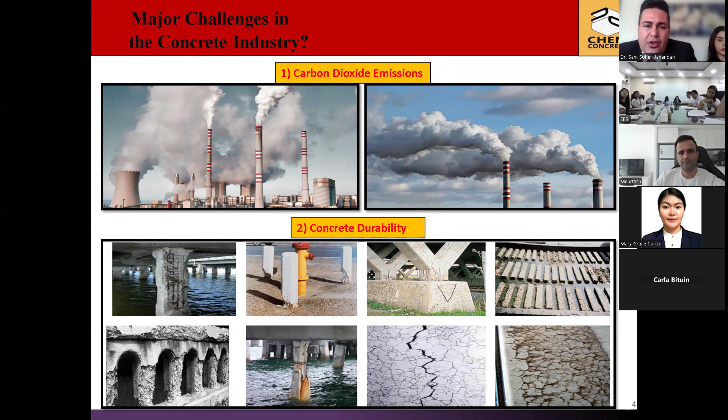In terms of carbon dioxide emissions, we all know that the cement industry is responsible for over 8% of global CO2 emissions. This issue could be addressed by minimizing the amount of cement in concrete, and another way is to extend the service life of concrete structures, so we can improve strength and durability while minimizing cement. I will discuss this in further detail.

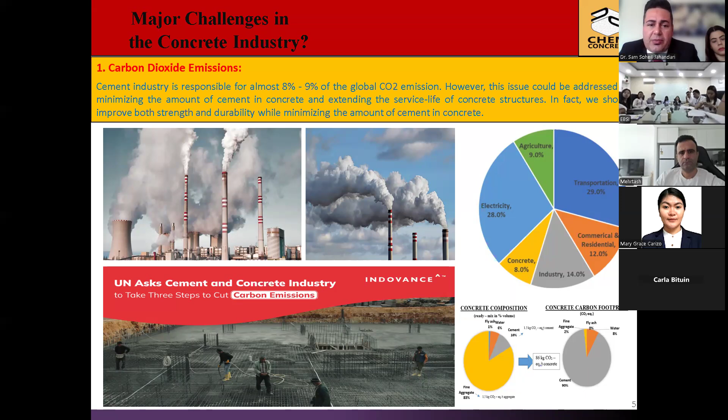In terms of concrete durability in all aggressive environments, like exposure to chloride, acid, sulfate, freezing, thawing, ASR, efflorescence, hydrostatic pressure, rainwater, steel corrosion, salt attack, research and science has proved that the ingress of water and the corrosive chemicals inside water is the main reason responsible for all the major physical and chemical degradation of concrete structures, infrastructure, and pavements, which shortens their lifespan and results in annual costs of billions of dollars to asset owners.

For improving the durability of concrete, we can use surface protection coatings, membranes, or integral waterproofing. But integral waterproofing admixture has several benefits over surface protection, because integrally waterproof concrete is not vulnerable to deterioration, does not require regular maintenance or reapplication, does not include application cost, reduces construction time, and can be used where surface protection is too complex or impossible to apply, like deep foundations.

Here you can see, for example in the photos, exposure to seawater, physical salt attack, alkali silica reaction - also known as concrete cancer - sulfate acid attack, freezing thawing, reinforcement corrosion. In all these conditions, the penetration of water and the corrosive chemicals inside water is the main reason responsible for the deterioration of concrete.

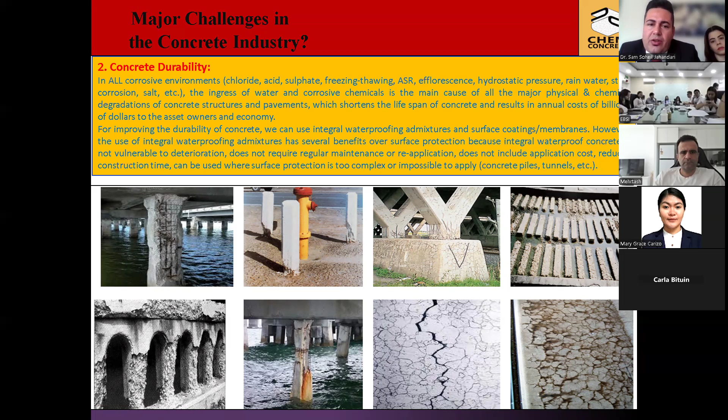Over the past 8 years, our R&D team, mainly in Australia, conducted an extensive review study and reviewed almost all the existing knowledge in the area of concrete waterproofing admixtures and durability. We reviewed over maybe 4,000 articles and books published in this area, and we have published the most comprehensive sources when it comes to concrete waterproofing admixtures. Here you can see the first article, Integral Waterproof Concrete: A Comprehensive Review.

I'm the first author here. This is currently the most comprehensive source on integral waterproofing admixtures for all engineers, PhD students, scientists, and R&D experts associated with the development of waterproof concrete. The next article is focused on integral hydrophobic admixtures, one type of concrete waterproofing admixture. The next one is focused on self-healing crystalline admixtures. The other one is on coatings, primers, and different additives.

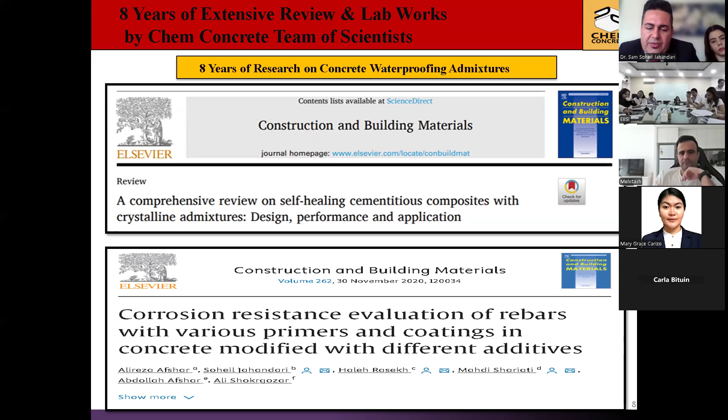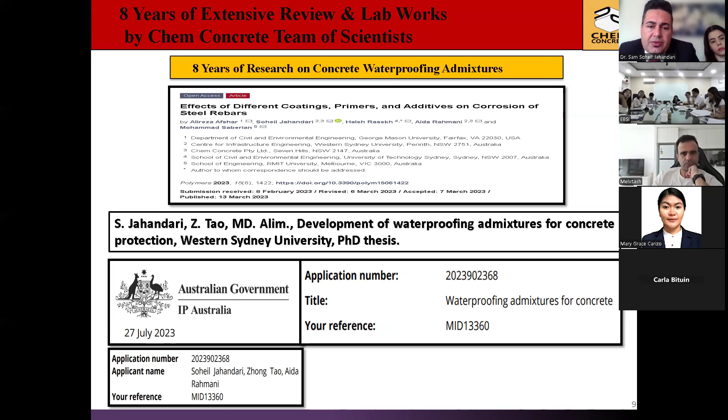My PhD was also focused on development of waterproofing admixtures for concrete protection. We also have patented our technology, which is right now a globally protected patent.

The major findings over the 8 years of our research studies, by our well-known team of six globally distinguished professors, 14 PhD holders, and over 8 engineers specialized in the field of concrete technology, material science, and chemical engineering.

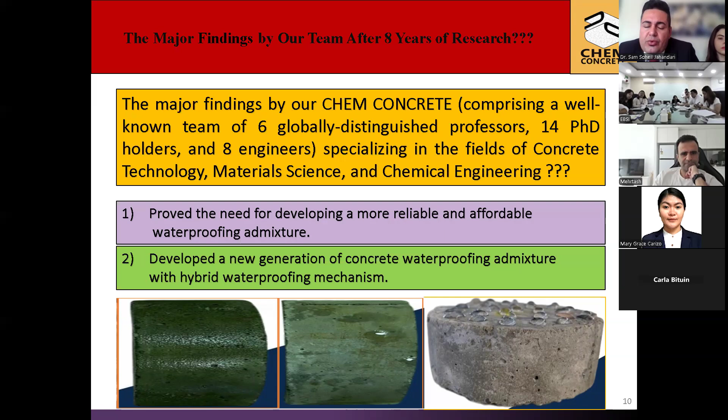We proved that there is a need for development of a more reliable and affordable waterproofing admixture, and at the same time developed a new generation of concrete waterproofing admixtures with a hybrid or multifunctional mechanism. This slide is somehow very important because it summarizes the main finding of over 7-8 years of our research studies in just one paragraph.

Over almost 8 years of literature review and experimental studies on a wide range of concrete waterproofing and durability enhancing admixtures, we showed that the current admixtures on the market can improve concrete waterproofing or durability performance often by around 2% to 25%, and in most cases, maybe over 90% of the times, by only around 10%.

This claim has also been reported and proven by several other independent organizations and independent researchers, such as the Concrete Society in the UK. Similar reports have also been published by the Concrete Institute of Australia, and in some other publications. We have provided some examples here. Accordingly, there was a need to further improve the waterproofing performance of these admixtures, or develop a more reliable and effective solution to tackle the issue with concrete waterproofing and durability.

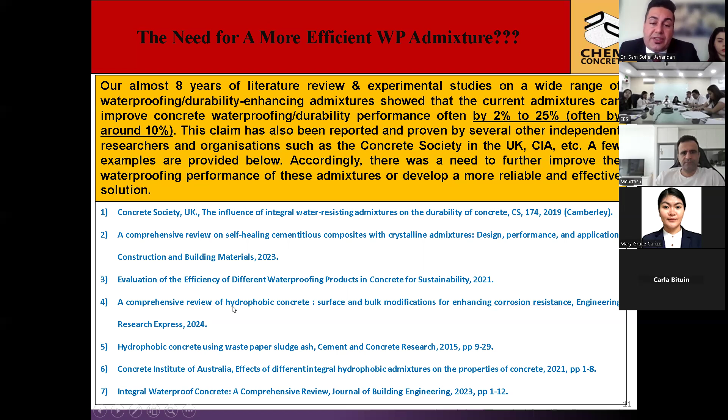For example, here the first report, just recently, the Concrete Society in the UK, as an independent party, conducted a comprehensive research on a wide range of current commercial waterproofing admixtures, and the conclusion is that they reported almost all the examined products were found to be either ineffective or with quite limited impact on delivering a true waterproof and durable concrete. Similar reports have also further confirmed this claim.

Then after that, we worked for several years and eventually developed hybrid ChemConcrete waterproofing admixture, which is a new generation of concrete waterproofing and durability enhancing admixtures.

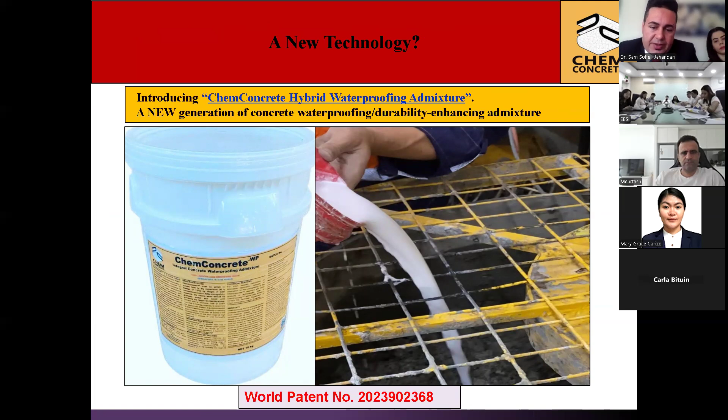You can see it's a world patent. The mechanism by which our ChemConcrete waterproofing admixture provides a waterproof and durable concrete is fundamentally different from all the existing admixtures on the market.

Just a bit more information about the mechanism. Before our admixture was introduced, concrete waterproofing admixtures were mainly classified into three to four groups: hydrophobic or water repellent admixtures, which can reduce water absorption or improve durability by up to 25% in the best case; pore blocking admixtures, which similarly can reduce water absorption and improve durability by up to 25%; crystalline admixtures, also known as self-healing admixtures, which can reduce water absorption or improve durability by up to 25%; and densifying admixtures, which are less effective and can reduce water absorption and improve durability by up to 20%.

But our patent and our technology is a new category of concrete waterproofing admixtures, called hybrid admixture. Independent testing has proved that this hybrid admixture can reduce water absorption and improve durability by 70 to 95%, depending on the dosage used.

Current waterproofing admixtures on the market normally use only one waterproofing mechanism or agent, like hydrophobing, crystalline, self-healing, pore blocking, or densifying. But in our ChemConcrete Hybrid Admixture, different waterproofing agents such as hydrophobing, pore blocking, self-healing, densifying, and nanosized chemicals were modified and used together. That's why this product benefits from a more comprehensive hybrid waterproofing mechanism, with significantly improved performance in enhancing concrete durability, strength, waterproofing, and overall quality.

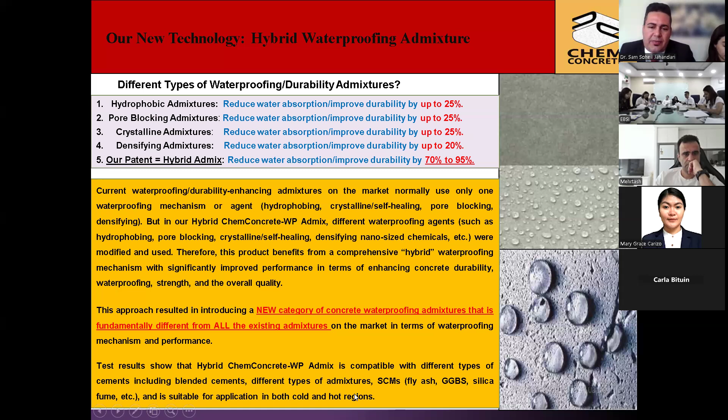It's usually a white to gray, grayish color, and is normally suggested to be used at a dosage of 10 to 20 liters per cubic meter of concrete, or 2 to 4 gallons per cubic yard. Sometimes we've noticed that as little as 5 liters per cubic meter is also used. We supply this admixture in 15 and 20 liter pails, 200 liter drums, and 1000 liter IBC tanks.

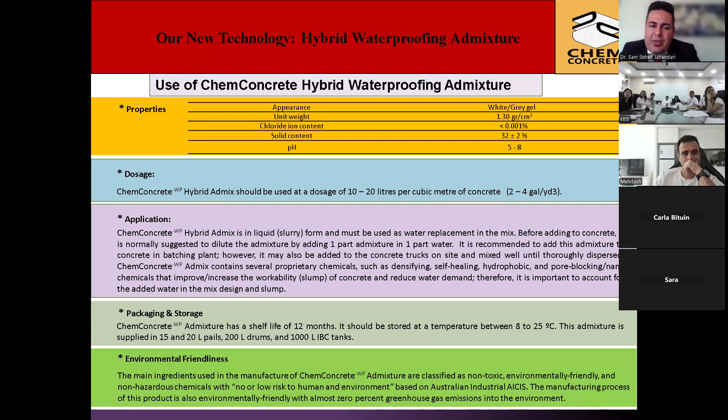It's environmentally friendly. Here, independent research was conducted by universities in Australia and the UK — they got free samples of different products and we asked them to do testing, comparing different products with different technologies and waterproofing mechanisms against our product. This summarizes the most important characteristics.

Concrete treated with two crystalline admixtures, one pore blocker, one hydrophobic, and one densifier was compared with our hybrid ChemConcrete waterproofing admixture. The 28-day compressive strength of control, untreated concrete was 39 MPa. For the first crystalline it was 39, second crystalline 40, pore blocker 41, hydrophobic 37, and densifier 41. But with our product, it was 58 MPa.

In all these conditions, the highest dosage recommended by the suppliers was used. A similar trend was observed for flexural strength. In terms of water absorption, control concrete had 8.1% water absorption. The first crystalline had 7.6%, second crystalline 7.5%, then 7.3%, 6.9%, and 7.1%. So in general, they reduced water absorption by around 10%.

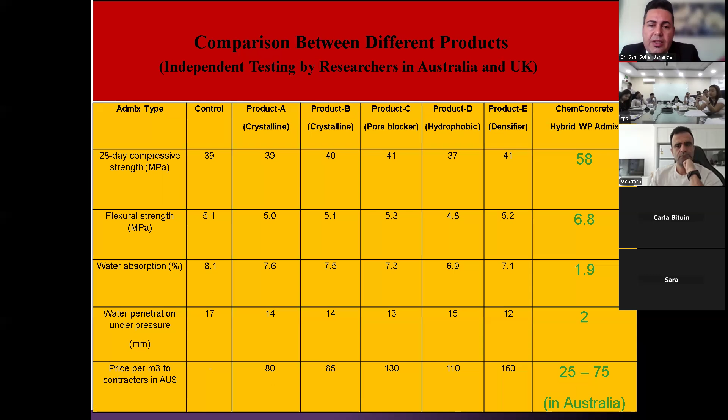This is another research conducted by independent researchers and universities in the UK and USA, comparing water absorption. This is a published research.

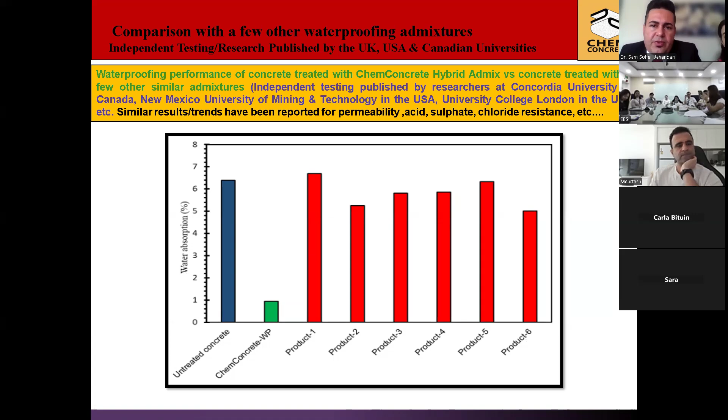Just like in terms of water absorption, you can see controlled concrete versus concrete treated with our ChemConcrete waterproofing admixture, and also 6 other products. You can see the huge difference that our product has generated on the waterproofing performance of concrete. So you can see a few photos of our concrete lab.

To summarize the main independent test results, it's been proven that our product can reduce the water absorption permeability of concrete by 70 to 95%. It improves compressive and flexural strengths by 20 to 45%, improves abrasion resistance and elastic modulus by 20 to 42%. In terms of compressive strength, sometimes we have achieved even up to 55% as well.

It reduces drying shrinkage by 18 to 40%, improves crack resistance by 30 to 45%, reduces cement usage by 16 to 32%. It all depends on the dosage of the admixture used. It improves workability, finishability, and segregation resistance, eliminates excessive bleeding, has almost no impact on setting time or heat of hydration, and significantly improves durability in acid, sulfate, chloride, ASR, and freezing-thawing conditions, and also prevents steel corrosion and efflorescence.

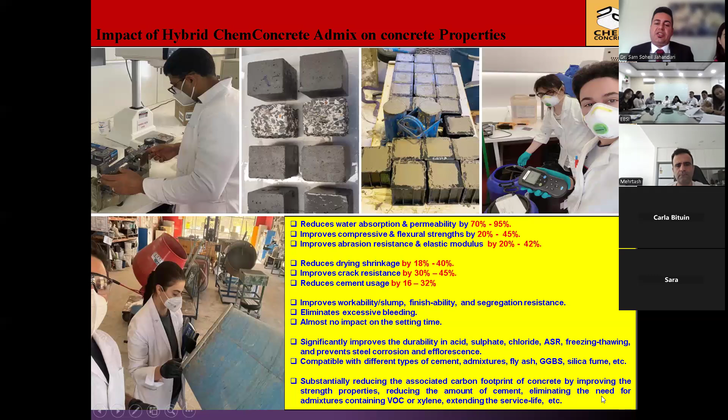It substantially reduces the associated carbon footprint by improving the strength properties, reducing the amount of cement, eliminating the need for admixtures containing VOC or xylene, and also extending the service life of concrete.

So far, during the first year, we supplied free samples of our product to over maybe 70 to 80 companies and universities from different countries. In return, we asked them to provide us with independent testing certificates. That's why right now our product is probably the most independently tested and proven admixture on the market.

So far, it's been independently tested by several ready-mix concrete suppliers, both in Australia and several other countries, by private laboratories and companies both in Australia and overseas, and by several universities and academics in Canada, the UK, the USA, Australia, and several other countries as well. Some of the test results have already been published in international conferences or journals.

In brief, all the independent test results we have received so far show that those companies have reported and received similar results to what we have reported in our technical data sheets. They have further proved the effectiveness of the product. Here in the left table, you can see the acid, sulfate, and chloride resistance of control concrete compared to concrete containing our admixture. In the right table, you can see the water absorption, water penetration, and some other concrete properties.

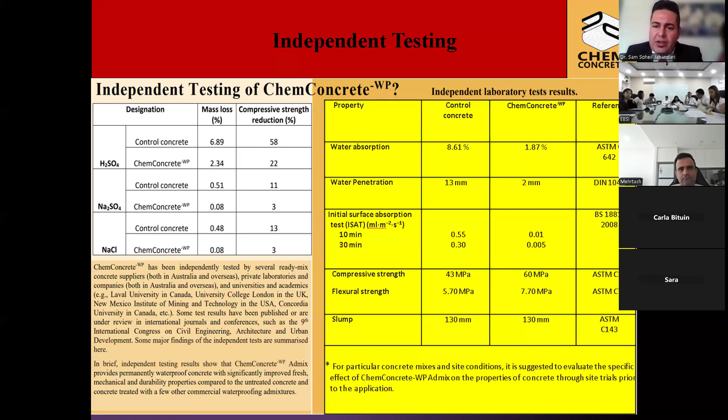And the good thing is that recently we received, our admixture passed the requirements of ASTM C494, and we received a compliance certificate from an AASHTO certified lab, SGS TEC Services in the USA, which is one of the most well-known labs for this.

Excuse me, would you please mute yourself? Sorry, John. Sorry, sir. Sir Sam. Yeah, sorry, they are asking. You hear me, Sir Sam? Yes, they are asking what is the composition. We will answer all these questions after the presentation is done. Okay, I think that would be more convenient for you as well.

So we have received a compliance certificate with ASTM C494 from SGS TEC Services in Atlanta, and the product passed all the requirements of that standard. The product was also tested by Boral, which is probably the most well-known NATA accredited laboratory, and it also passed all the requirements of AS 1478.

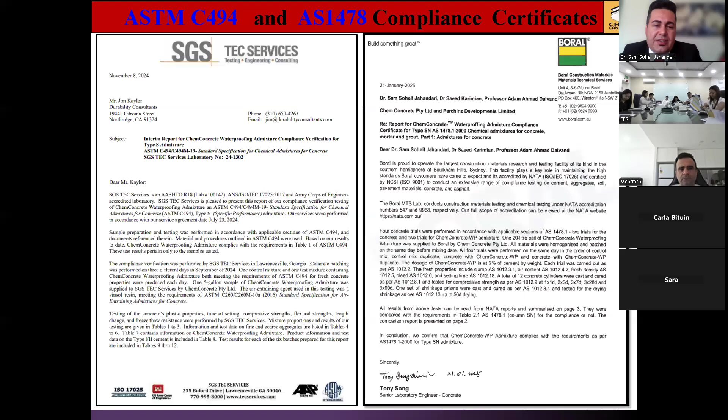So two of the best, probably the most widely used standards for compliance of these products. Regarding ASTM C494, which was tested by SGS TEC Services, a well-known AASHTO certified lab in the USA, you can see some test results.

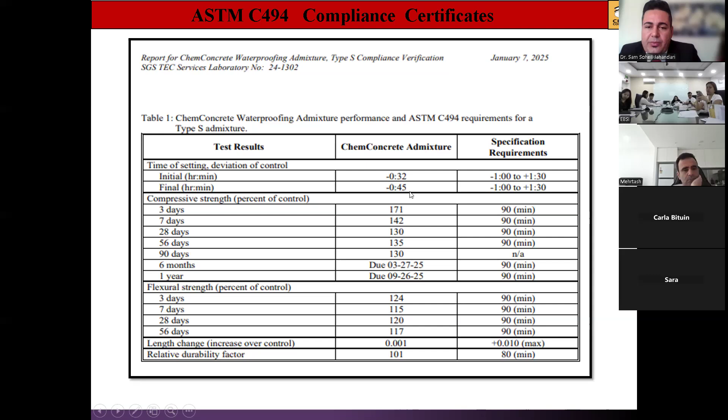It passed, after 3 days, the requirements of - for example the standard was 90% compared to the control, but for our product it was like 171%. In all these conditions, our product passed all the requirements of the standards with very impressive test results, way much better than the minimum requirement. You can see some other similar test results for flexural strength, for length change, for freezing-thawing, and for other properties of concrete.

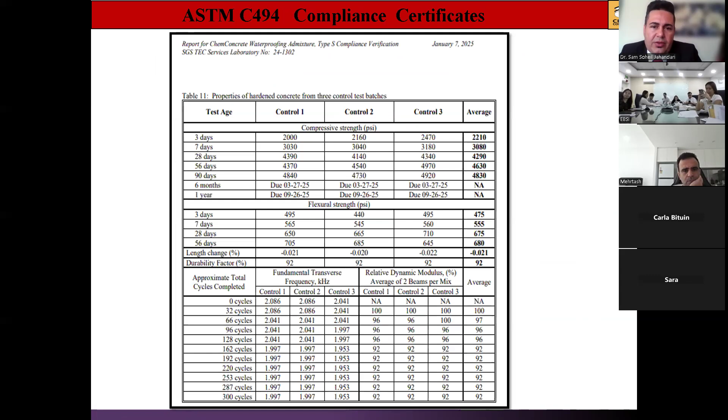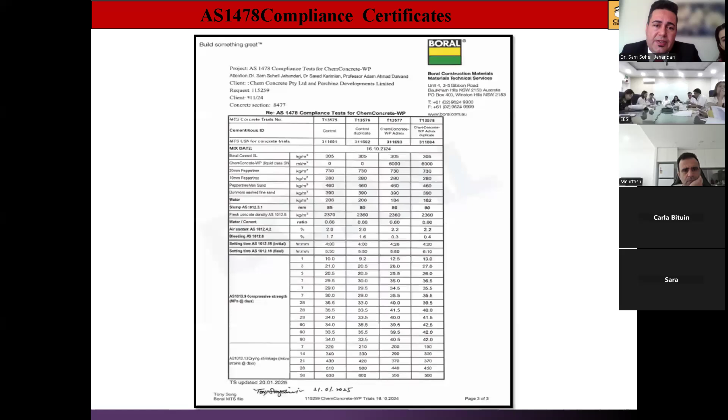Next is the AS 1478 compliance certificate. You can see it has passed all the requirements of the standard, and we successfully received both of these compliance certificates. Here you can see, for example, the testing done by Hy-Tec, which is one of the major ready-mix concrete suppliers here in Australia, and they are also NATA accredited.

For example, they compared control concrete with concrete treated with our admixture. In terms of compressive strength, the main job of our admixture is to enhance concrete waterproofing and durability. But besides that, it has a positive impact on all other concrete properties as well. Here you can see the impact, for example, on compressive strength.

The 1 day compressive strength was 14 MPa for control, 25 MPa for concrete treated with our admixture. The 7 day compressive strength for control was 45 MPa, while for our admixture it was almost 80 MPa. Similar results have been achieved on other curing days. You can see a huge improvement in the compressive strength test results.

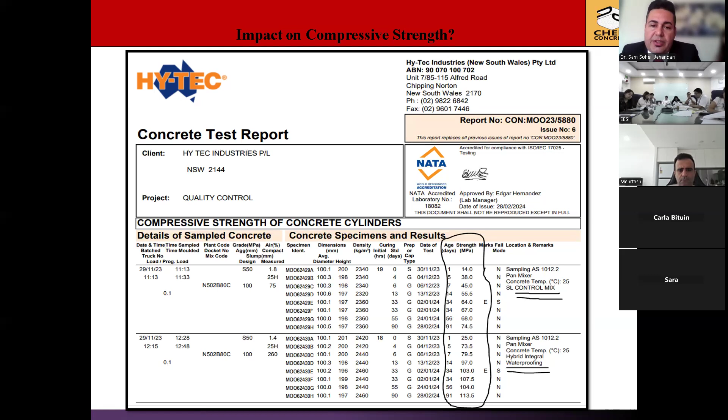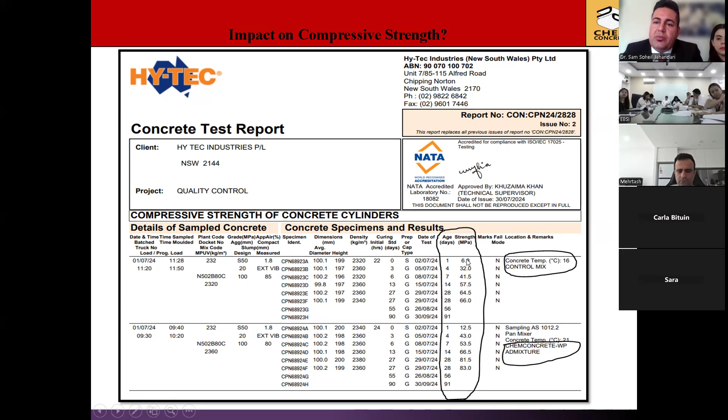You can see another mix design. The 1 day compressive strength was 6.8 for control, 12.5 for concrete containing our admixture. A somehow similar increasing trend was observed on other curing days. This is particularly good because it allows construction companies, especially precast concrete manufacturers, to remove formwork in much shorter time compared to normal.

So it saves time and money. Drying shrinkage is one of the major issues for concrete cracks, especially at early ages of curing. Here we can see our product has significantly decreased the drying shrinkage of concrete. After 56 days, the drying shrinkage was 510 for control concrete, and in case of concrete with our product, it was 350.

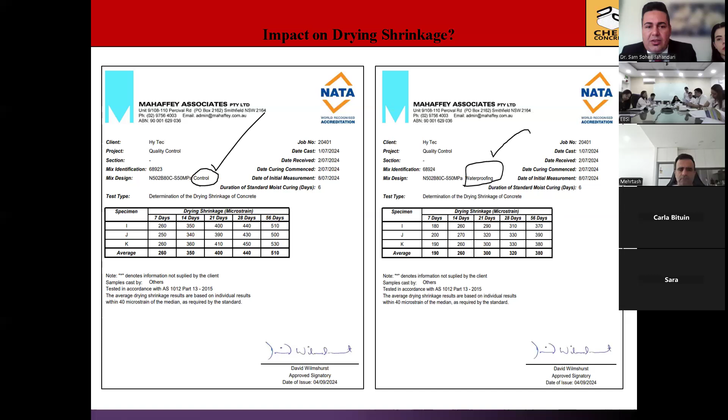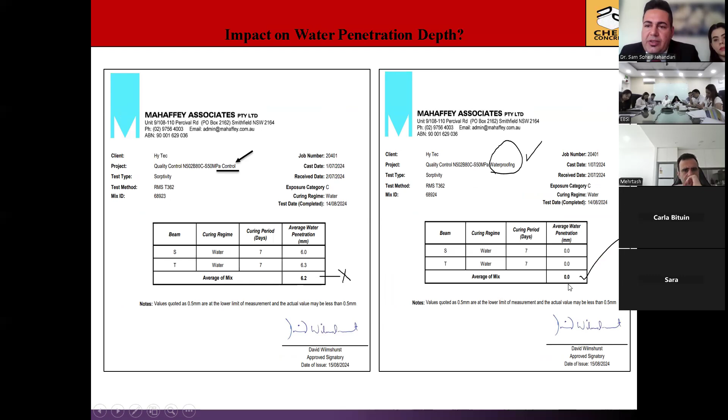These are all very positive results, which show that the admixture not only has very good waterproofing and durability performance, it also has other valuable benefits as well. This one is probably the most important job this admixture is doing. Control concrete had 6.2 millimeter water penetration depth, but after using our admixture, the water penetration depth was reduced from 6.2 millimeter to 0 millimeter. This is very impressive test results.

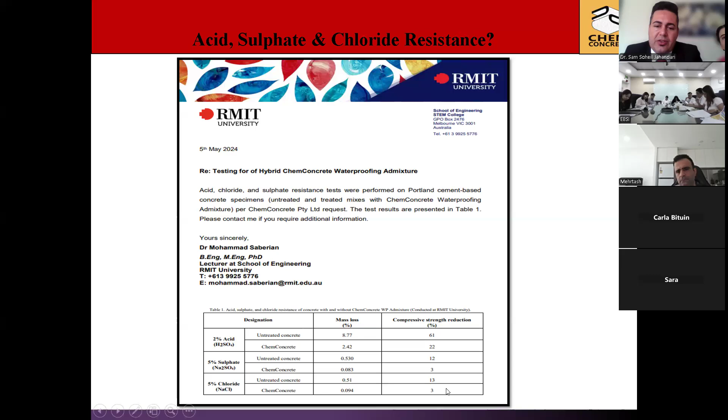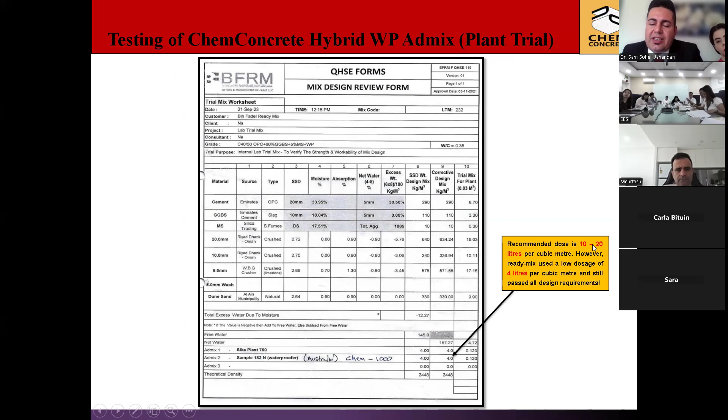This is an interesting test result by a ready-mix supplier in the UAE, in Dubai. The recommended dosage of our product is normally around 10 to 20 liters per cubic meter, but they used only 4 liters per cubic meter of concrete. What was very interesting was that they used almost less than half the dosage we recommend, and they still passed all their design requirements.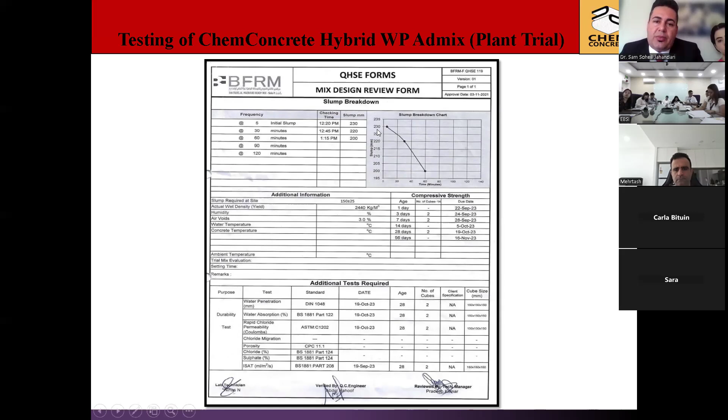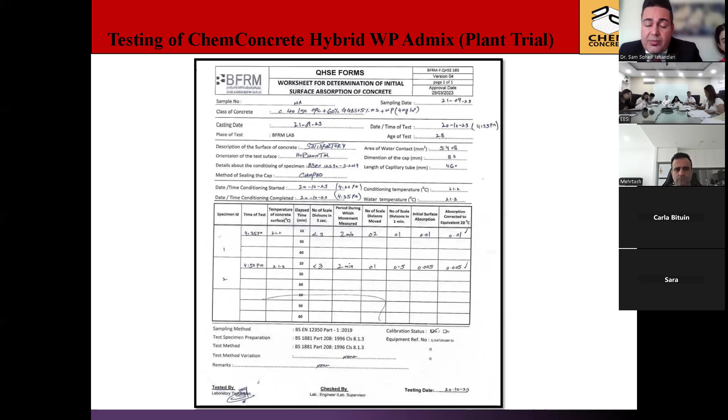In terms of slump retention, after 1 hour, slump was only reduced from 230 millimeter to 200 millimeter, which shows the product has very good slump retention. After 3 days, it passed the 28-day compressive strength requirement. And you can see the absorption was 0.005 and 0.01, way much lower than what was specified by the design engineer.

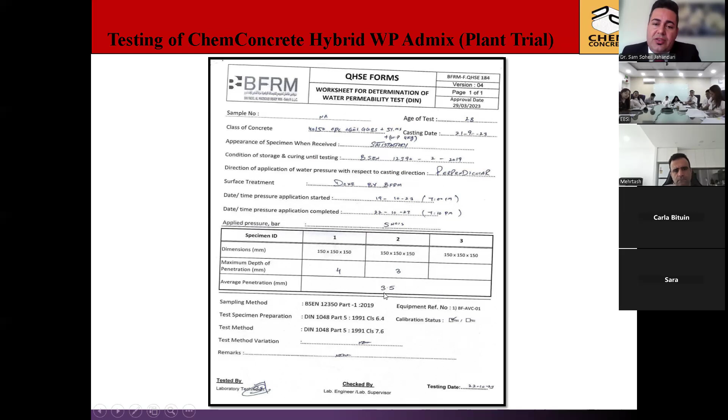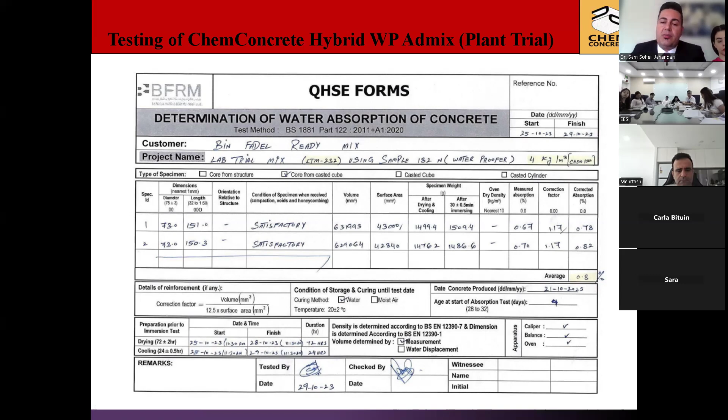You can see the water penetration depths, the minimum based on the design requirement was, I think, 8 millimeter. But by using only 4 liters, less than half the dosage we recommend, they achieved 3.5 millimeter water penetration, and water absorption was 0.8%. What's very interesting is that by using less than half the normally recommended dosage, they could pass all their design requirements.

This slide probably summarizes all the main findings of the independent test results done so far, and will probably answer some of your questions. The independent test results and research have proved that our product, depending on the dosage used, can reduce water absorption and permeability by 70 to 95%, which shows it's at least over 60% more effective than any other similar product on the market.

It improves compressive and flexural strength by 20 to 45%, improves abrasion resistance and elastic modulus by 20 to 42%. It can reduce cement usage by up to 32%, usually 16 to 32%, which provides cost saving and also CO2 reduction. It can reduce drying shrinkage by 18 to 40%, improves crack resistance by 30 to 45%, and improves cohesion, workability, slump, finishability, and segregation resistance.

Eliminates excessive bleeding, has very little impact on the setting time, significantly improves concrete microstructure, has almost no impact on the heat of hydration, and significantly improves durability against acid, sulfate, chloride, ASR, freezing, thawing, and hydrostatic water pressure.

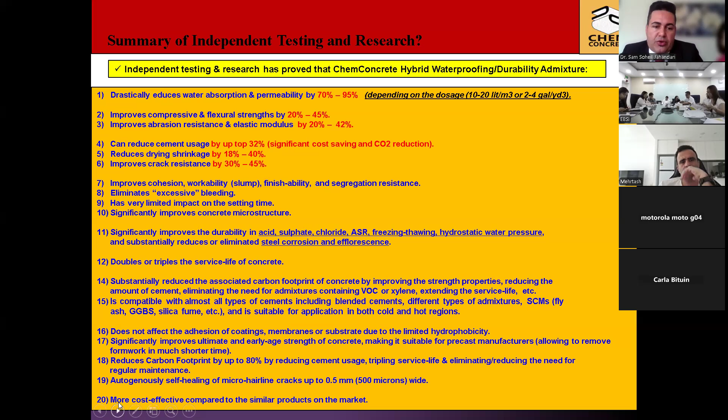It has autogenous self-healing capability to heal micro cracks up to 0.5 millimeter, even a little bit better than crystalline admixtures. And it's usually the most cost effective compared to other similar products on the market.

So far, the product has been used in quite a wide range of applications, like basements, water tanks, foundations, swimming pools, warehouses, concrete pavements, and driveways.

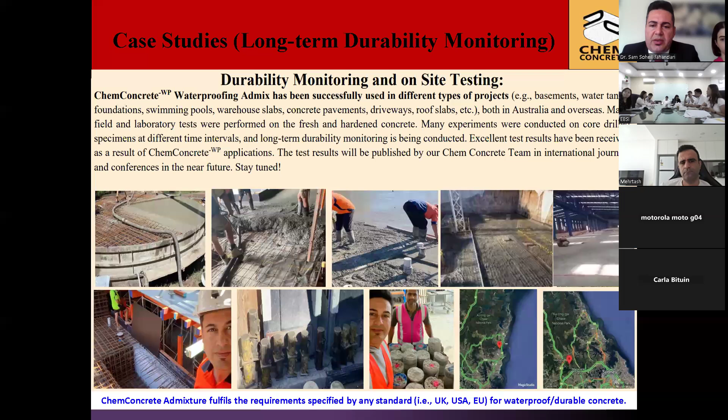You can see a few photos of the applications of the product. It was used, for example, next to seawater, and in different applications involving exposure to hydrostatic water pressure, chloride, sulfate, and other conditions.

In this slide, one of the traditional methods of improving concrete durability is to use like 7 to 15% silica fume. Here we have compared silica fume with our product. You can see here in Australia, the price per ton for a good quality silica fume is over

$1,000 per ton. For our product, this price is specifically for Australia, so it's not applicable to other countries. The required amount per cubic meter is 30 kilo or 10 kilo, and here's the impact on strength development.

Silica fume usually gives like 6 to 11% strength development, but in case of ChemConcrete, by using the minimum dosage we recommend, there is like 38% improvement.

In terms of impact on waterproofing or durability, because there is a direct relationship between water absorption, permeability of concrete, and durability or lifespan, silica fume gives like 3 to 7%, but in case of ChemConcrete, it's 70 to 95%.

And here in Australia, the price per cubic meter is almost similar to silica fume.

One of the most followed ways to reduce CO2 emissions in the concrete and construction industry is to use supplementary cementitious materials like silica fume, fly ash, slag, or other supplementary cementitious materials. But research has proved that these materials can reduce CO2 emissions by only 10 to 20%.

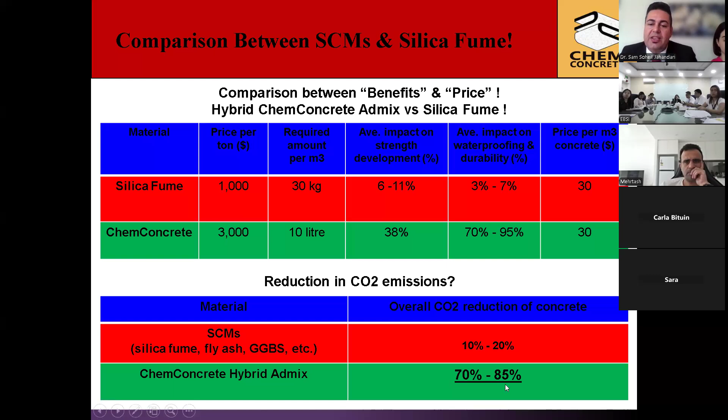But in case of using ChemConcrete Hybrid Admixture, we have done comprehensive analysis, and it's been proven that it can reduce overall CO2 emissions by 70 to 85%.

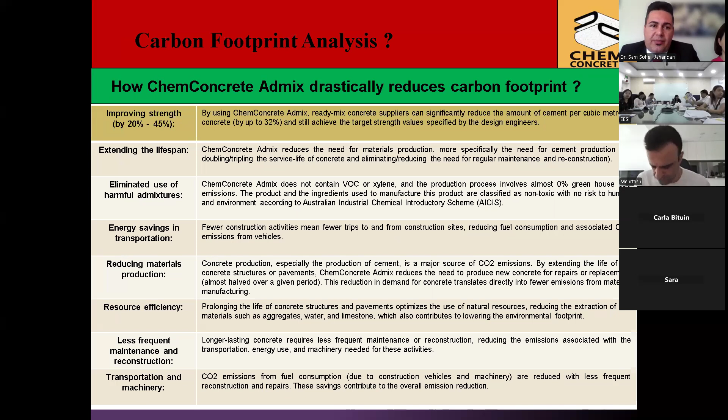What we have considered in this analysis includes improving strength, which is 20 to 45% in case of our product, extending the lifespan, eliminating the use of harmful admixtures, energy savings in transportation, reducing materials production, resource efficiency, less frequent maintenance and reconstruction, and transport. Quite a wide range of parameters have been considered while calculating the overall CO2 reduction.

Another thing that might be interesting for you is the applications of this product. It can be used, for example, in basements, sewer pipes, manholes, concrete pavements, foundations, warehouse slabs, swimming pools, concrete waterways, service environments, bridge decks, wharves, concrete pipelines, water tanks or OSD tanks, podium decks, trafficable concrete, concrete kerbs, boat ramps, concrete piles, parking lots, reclaimed land, road barriers, landscape concrete, tiles, dams, tunnels, marine environments, mining structures, driveways, balconies, or roofs - quite a wide range of applications.

In general, ChemConcrete admixture can be used in any situation that's damp or wet, or where the transfer of moisture, intake or absorption of water, and presence of salts, acid, or other corrosive chemicals is unpleasant. This product provides permanently waterproof concrete under both static and hydrostatic water pressure.

It has several benefits over traditional surface protection, because right now most construction companies in the world are using things like bentonite blankets, membranes, and coatings to provide waterproofing to their projects. But right now this is one of the best methods, because it's more effective than the current commercial waterproofing admixtures on the market - a better, more cost effective solution.

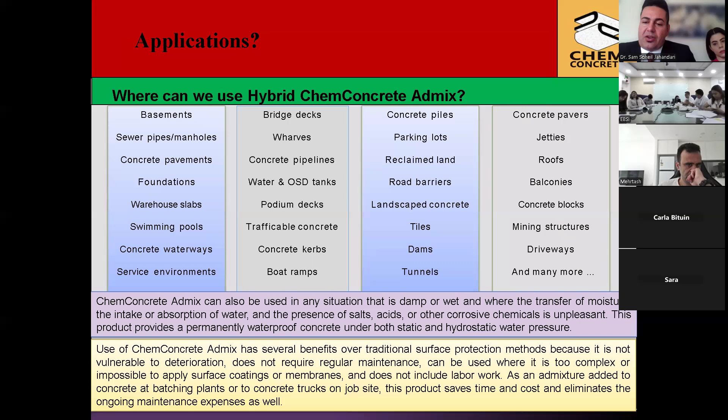Compared to traditional surface protection methods or membranes, it has several benefits. For example, it's not vulnerable to deterioration, it does not require regular maintenance or reapplication, and it can be used where it's too complex or impossible to apply a protection layer, coating, or membrane - and it does not include labor work. As an admixture added to concrete at batch plants or to concrete trucks on site, this product saves time and cost and eliminates ongoing maintenance expenses.

Over the past year, since we started our main job, we have received huge attention from all around the world. So just briefly, I want to mention what has made us different from competitors, and why we have received huge attention and built a good brand over a very short period.

One of the main reasons is the quality and efficacy of our product. We guarantee our product to be at least 60% more effective than any other similar product on the market in terms of delivering a true waterproof, durable concrete. It has self-healing, hydrophobic, and pore blocking characteristics, all included in just one single product. At the same time, it's not only a waterproofing or durability enhancing admixture - it generates very positive impact on all other concrete properties as well, making it a multifunctional admixture.

In terms of price, it's normally more cost effective compared to similar products on the market. Another thing is that although the product is a relatively new technology, currently it's one of the most, probably the most, independently tested and independently proven products on the market. It complies with ASTM C494, AS 1478, as tested by well-known AASHTO and NATA accredited labs.

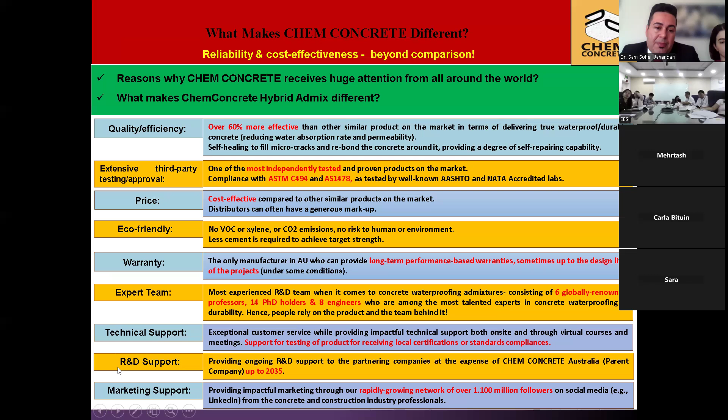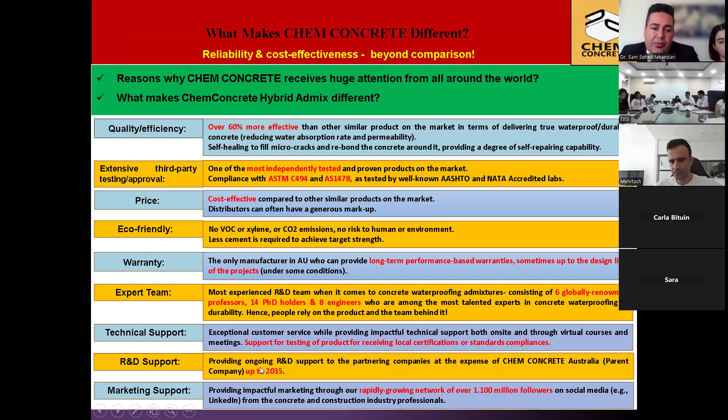We also provide exceptional customer service while providing impactful technical support, both on site and through virtual courses and meetings, as well as R&D support and marketing support.

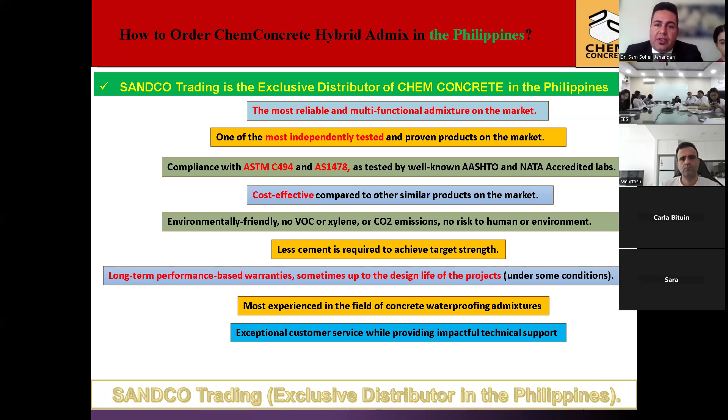www.chemconcrete.com.au. There is a section called technical documents, and those documents are usually the most recent updated ones. You can find several documents there related to independent testing, technical data sheet, safety data sheet, compliance certificates with ASTM, with AS, carbon dioxide emissions calculation, and quite a wide range of different documents that you can review to find more information about this product.

So in summary, we believe that we have the best team, the best product, the most effective, and also the most affordable product. And we are more than happy to work with you and try to address any issues you have in the area of concrete waterproofing and durability.